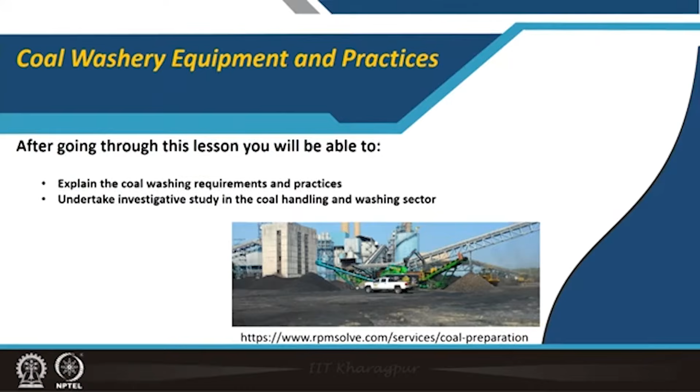many of the concentrating and screening equipment which we have discussed are also used in coal washing and coal handling plants. But still, today I am going to tell you about coal washery equipment and their practices, because this is going to be a very important business in the coming years. You know that at present 64% of our thermal power stations are using coal.

Now, though there is increasing interest and innovative technologies are coming up in the alternative renewable energy sector, non-renewable energy sources like coal are not going to be exhausted soon in India, and for economic power generation and power provision to the common people, we will have coal as a cheaper source, and for this reason you cannot ignore coal at this stage.

At present, we are producing more than 600 million tons of coal, out of which more than 90% goes to the power sector. So we need to improve this coal sector by cleaner technology, so that the coal remains clean, in the sense that while burning in the boiler it should not produce a large quantity of ash for rehandling, which could be an environmental problem. At the same time, when it is burned in the boiler, not many greenhouse gases should be released to the atmosphere.

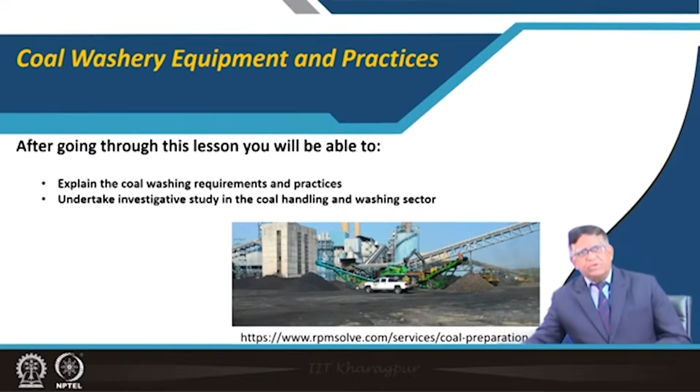So here, what is the problem associated with Indian run-of-mine coal? In India, though coal is available up to 1200 meter depth, we are producing most of the coal from less than 300 meter depth, and more than 90% of this coal is coming from surface mines. Now, we have two problems here. One is that the coal seam itself has poor quality coal.

This is because this coal was formed according to the drift theory, where organic material was brought and deposited, and under pressure and temperature it underwent coalification. In that process, a lot of inorganic substances were also impregnated in those coal seams, and that is why our coal has a high ash content.

Also, when we are doing surface mining, we do not do much selective mining, and at the coal floor or coal roof, between two layers of sandstone or shaly sandstone where the coal is, when you extract by blasting, a lot of non-coal material gets mixed up with the coal, and we call it dilution.

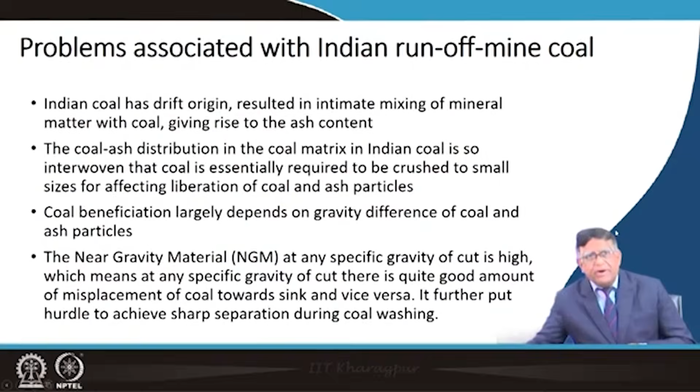Now the cleaning part of it is why coal preparation is so important, because if we liberate or separate this ash part, the non-coal part, then it will be doing ash reduction, which is a requirement from the environmental side, because disposal of this ash is a problem, and a lot of very fines get generated and create air pollution.

So the particulate matter going to the atmosphere is reduced, and also the ash handling in the power plant, that is after burning, cleaning your boiler, taking it out and separately disposing it in a place, that problem gets solved.

And moreover, sometimes in this beneficiating or washing process, if the coal inherently has sulfur, that sulfur can also be reduced. When sulfur is there in coal, it has a lot of other problems, for the boiler life as well as in washing, and if you are putting it in your metallurgical coal, it may totally affect the quality of your end product.

Also carbon emission reduction is another issue: when you are getting a high calorific value, you get it properly burned, and your carbon dioxide production is controlled. Greenhouse emissions can also be reduced, and the different gases coming out of your stack can also be controlled.

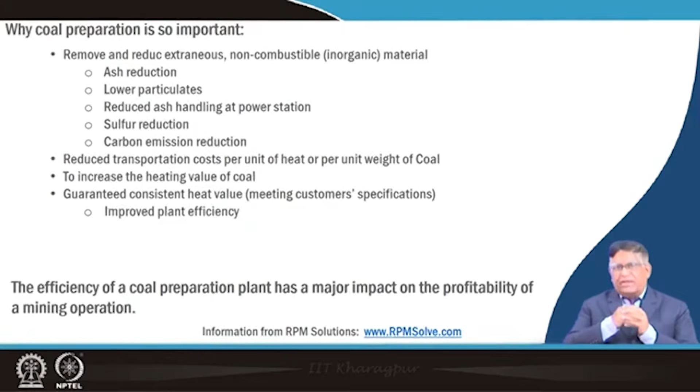Now the efficiency of the coal preparation plant has a major impact on the profitability of mining operations. That's why all coal mining people think about how the best quality can be given to thermal power stations. Now you must know the scenario of our Indian coal, how they are classified.

You know that we have metallurgical coal, called coking coal, and non-coking or thermal coal. Coking coal, depending on the percent of ash: steel grade 1 not exceeding 15% ash content. Similarly, grades 1 to 6 are there, up to 42 to 49%, which is very poor quality. In steel grade you have these two, and then the washery grade, which you can wash. This is the grading system of coal by different percentages.

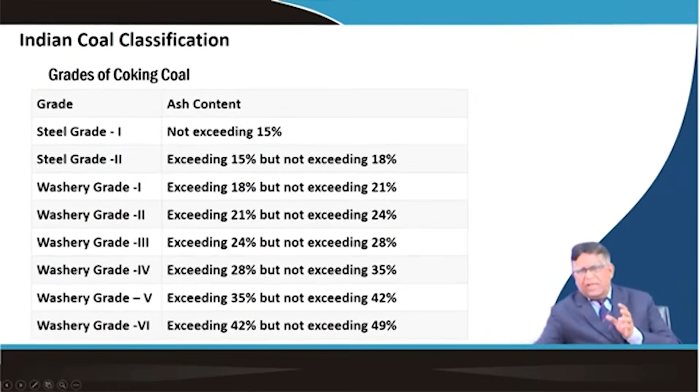But recently there have been certain changes in this. You can see the semi-coking grade has also come, based on ash and moisture together. If they do not exceed 19%, it is called semi-coking grade. And if ash and moisture together are between 19% and not exceeding 24%, they are also called semi-coking grade. Now why is this grading done?

Because on that basis our Indian coal pricing was done, but a lot of thought is now going on about exactly how coal should be priced and how the grade should be determined as a national level standard. People are still doing research on that standardization, but this is the accepted norm at present.

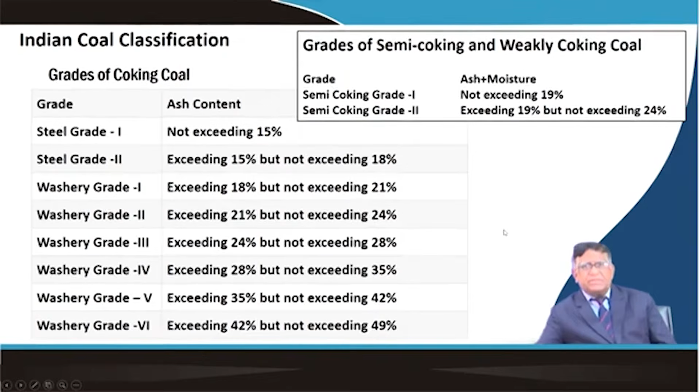And now they are given a grade. For all thermal grade or non-coking coal, the grading is given up to 17 grades, and this grade is given on the basis of the calorific value, that is, how many kilocalories per kg there are. Now if you are getting more than 7,000 kilocalorie per kg, then it is grade 1. In India there are very few mines where this grade 1 coal is available.

Some were there in the northeast coalfield, some places up to 7,000, 7,500. However, they had the problem of ash content. But G4, G5 are to a certain extent available in Raniganj coalfield, and in Bharat Coking Coal field also. But most of the coal in our country is going to be G11, G12, and the big companies producing a lot of coal, for example Mahanadi Coalfields, have more mines with G9 to G13.

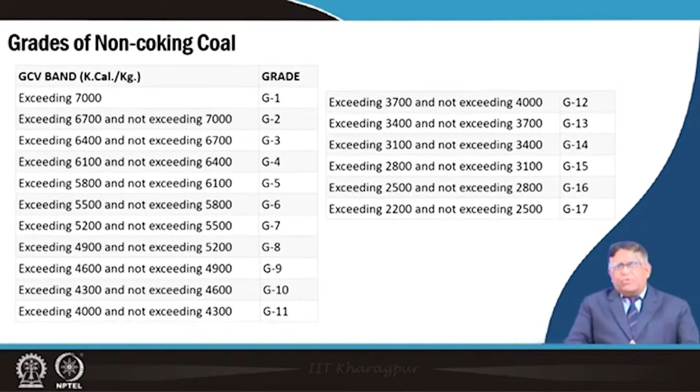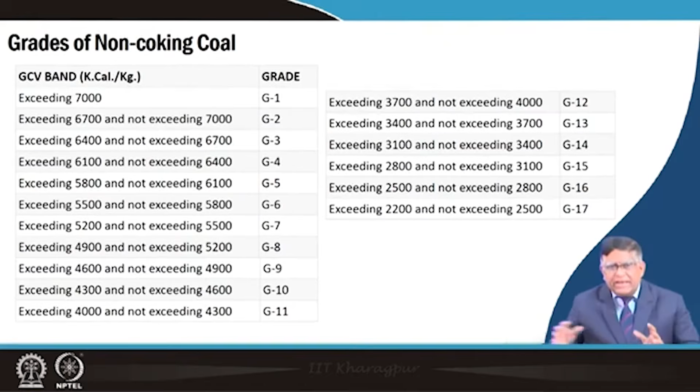That means getting 3,500 kilocalorie per kg is a very good expectation. There are many places in India where you are burning coal and get only somewhere near 2,500 kilocalorie per kg. Those are G17 type of coal, and accordingly the prices are fixed for this coal. You should have knowledge of this.

Since pricing will be on the basis of the grade, the impact is that the mine can think of how to optimize their mining operations and how they will handle the coal produced. If they have a different quality, different calorific value, and can improve it, say from G5 quality, by cleaning bring it to G2, or if they have G10 or G12 and by combining them can make it G5, then their economics will work.

So on a case-to-case basis, an economic study is carried out. That means if they want to invest in a washery, exactly how much return they may get, because of how much blending will be possible. So there can be a lot of decision-making problems. Whether you will invest your money in a washery or not can be decided on the basis of this. Mathematical models can be created on the economics of coal washing.

The Government of India has taken a number of initiatives. Actually, the need came from impositions from the environment sector. If you are selling coal with a very high ash content, it should not be carried a longer distance. That's why for power plants located more than 1,000 kilometers away, there was a restriction of not more than 34% ash, because otherwise you are wasting transportation per ton of coal. You will spend more fuel, and moreover you are carrying the pollutant from one place to another. So certain restrictions are there.

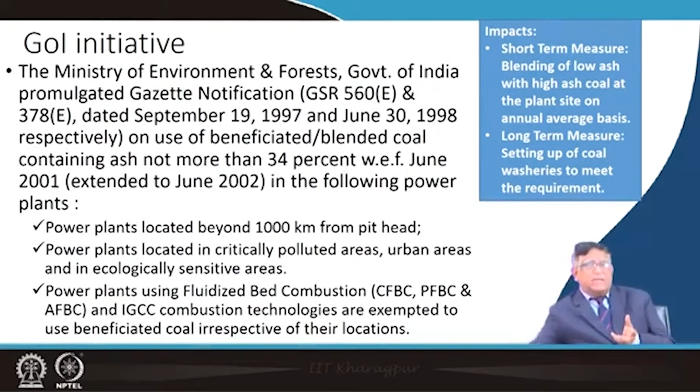So how exactly is this washing done? It is done by two methods: dry deshaling or the wet process. In dry deshaling, other than water, you can use air, and with that you will be able to separate it. That is a dry washing system.

In the wet process, as we already discussed in mineral beneficiation, instead of the mineral, the coal is crushed into smaller size and put in a liquid media of adjustable specific gravity to separate the lighter coal. In that media you increase the gravity by adding certain particles, so the media becomes heavier and the coal can float. The rejects from this process will have a lot of carbonaceous matter. So in a wet process, when producing washed coal, the rejects, which we call tailings, will go to the tailing dam or tailing pond.

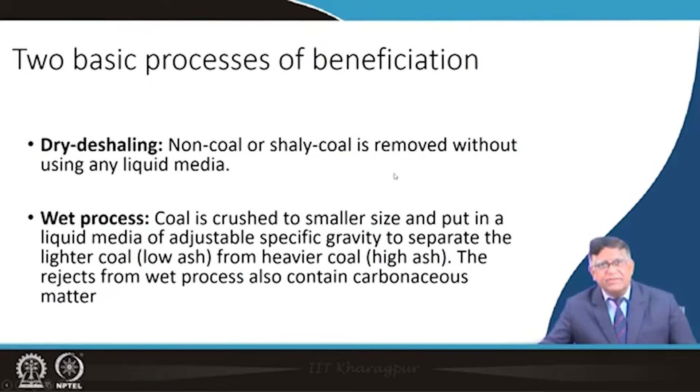There will be a lot of carbonaceous particles, and we discussed earlier how very fine particles of coal lying over there can be recovered to use their calorific value. That is also an area where future research and technology need to be developed.

In our Indian coal cleaning practice, earlier only coking coal was being washed, because steel making needs coking coal with ash up to 17 to 18% in India. Now the raw coal, whenever it comes from the mines, is washed, and the ash content in most of our coking coal coming from BCCL is at 25 to 30% ash.

So they had to be washed, and that is why the coal washery was established in India after coal mine nationalization. Some of the very old coal washing plants, like those in Sudamdih and other mines, were running. Now, since the Ministry of Environment and Forest introduced restriction on the use of high ash coal in power sectors, washing of non-coking coal has also become essential.

It is a comparatively recent phenomenon. According to government rules, any thermal power station situated beyond 1000 km from the pithead coal mine must use coal having less than 34% ash. So that created a new business - the mines will have to build up their washery.

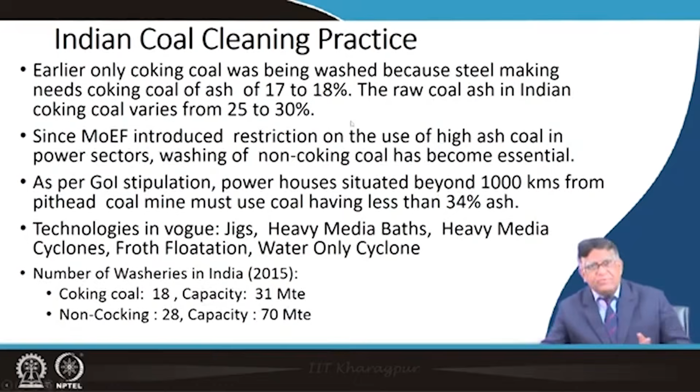You can see that in the coking coal sector, Coal India alone has 11 washeries, and other public sector units have 3 washeries. In private sector, some coal companies import from outside, but as per the requirement of the steel plant, they need to wash them. That's why they also built washeries.

In the coking coal sector, these 18 washeries came up, and in the non-coking coal sector, Coal India had 7, and the private sector came up with 21 washeries created across different subsidiaries. In total, our Indian coal washing capability is about 101.30 million tons right now.

Our coal consumption in the country is more than 750 million tons by now, and in another 3-4 years we are thinking 1 billion tons of coal will be consumed in India. If a certain amount of this coal is to be washed, that means there is a big business line.

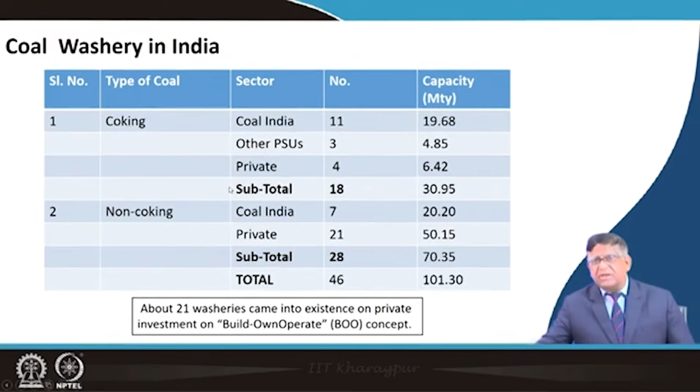So public and private investment came up, and a number of Indian firms started constructing these washeries. Now, coal preparation is the removal of undesirable material - whichever non-coal part is in the coal - which has to be separated from the ROM, run of mine.

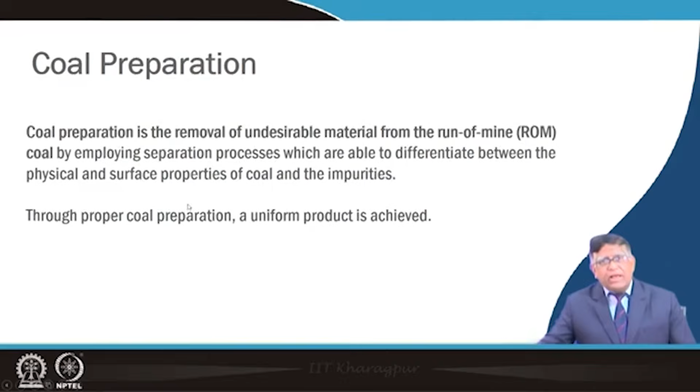Then, the separation processes which you have already studied will have to be done, and this gives a uniform product. Now what are the steps?

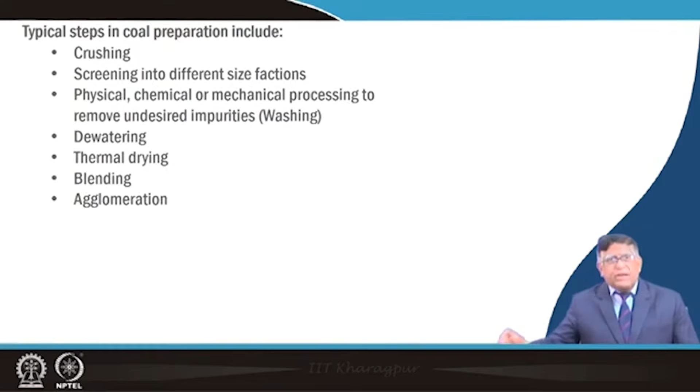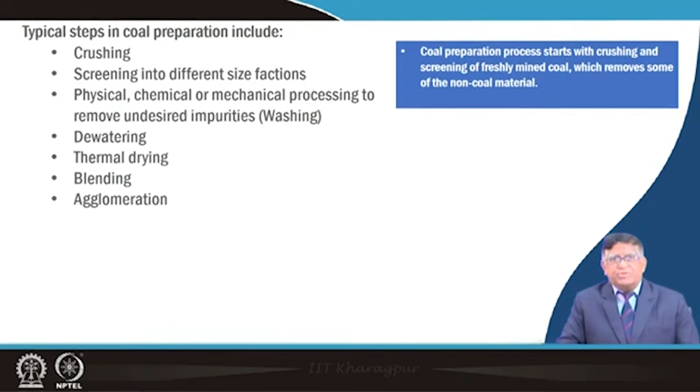You can note down the steps in coal preparation, which include crushing. Crushing is the first job you will have to do. This coal preparation process starts with crushing or comminution, where your freshly mined coal will be crushed into pieces by different types of crushers.

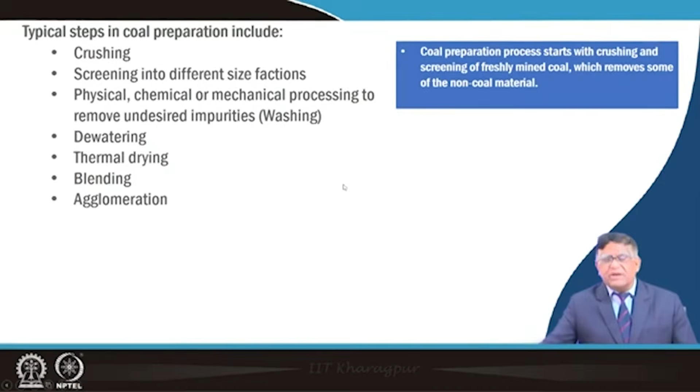There is no need of having a big jaw crusher or gyratory crusher. Softer coal may be crushed by a rotary coal breaker, and different types of coal breakers are available. Now washing is actually the process of separation of non-coal material, and for cleaning that coal, this represents the most important step of coal preparation.

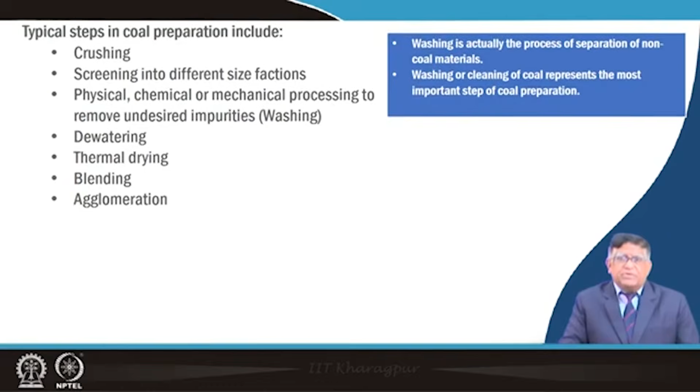That washing part is the core part of it, and for that we will have to decrease it. Then it is screening, where different size fractions will have to be screened, and then physical, chemical and mechanical processing is done. Physically means separation by density, chemically sometimes by content and constituent species.

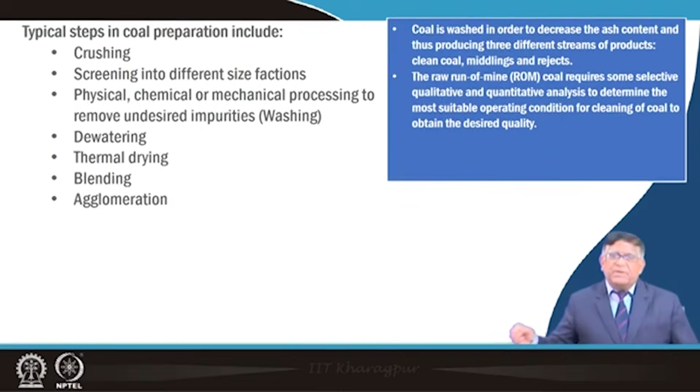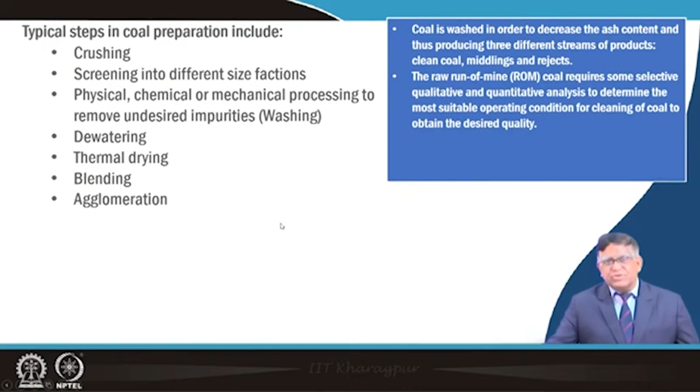Mechanically, you separate by comminution, stirring, spiraling operations. Once done by wet process, you dewater it, and then sometimes you need to dry it by thermal drying. Different grades of quality can be blended, and sometimes agglomerated. From the very fine coal recovered from tailings, if you can agglomerate it to make small briquettes, that is also done in a typical coal handling plant.

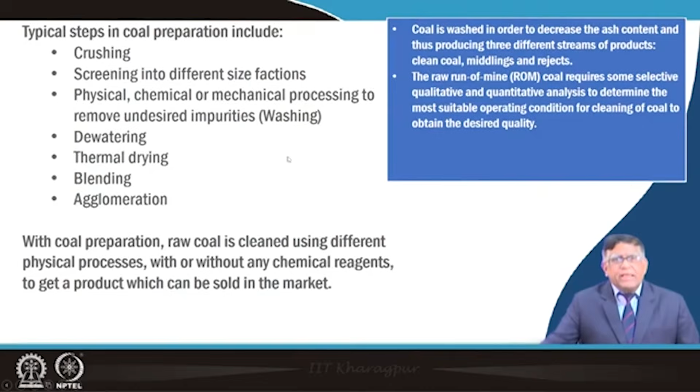With coal preparation, raw coal is cleaned using different physical processes, with or without any chemical reagents, to get a product which can be sold in the market. So that is how it is done.

The operations for cleaning the coal, summarily, are comminution, then sizing, then concentration. Clean coal means different grades - clean coal with only 7 to 9% ash, middling with 25 to 30% of ash, and reject with 65 to 70% ash, which is rejected.

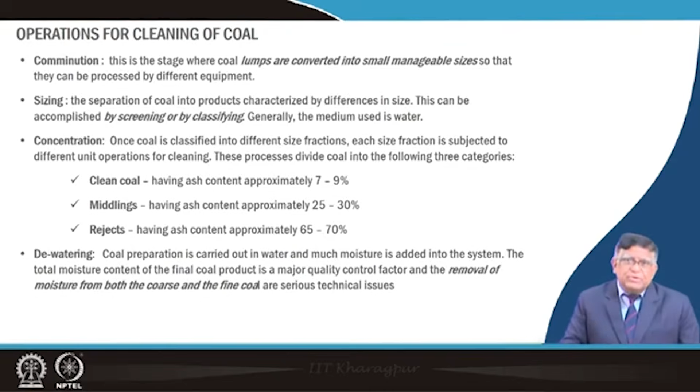Dewatering is another job, where coal preparation is carried out in water and much moisture is added into the system. So dewatering and drying is also part of this washing process, and there are a number of different equipment available. Different types of concentrators and all we have already discussed.

Now a barrel washer is a type of washer which is used - even used when collecting river stones for civil engineering purposes, in river sand and stone mining, where material comes with a lot of soil, dirt or sandy particles. They are fed into this type of barrel washer through a hopper, and the feed material goes through a chute inside it.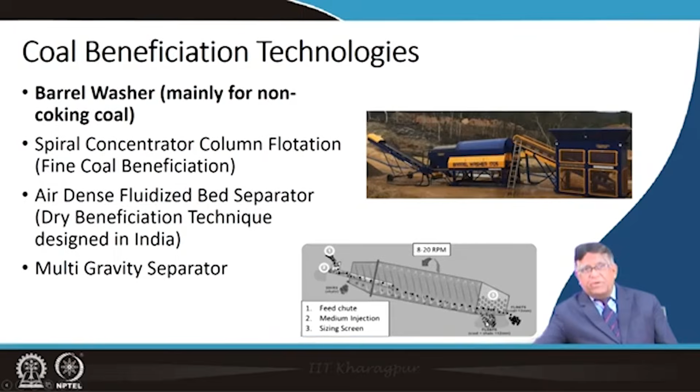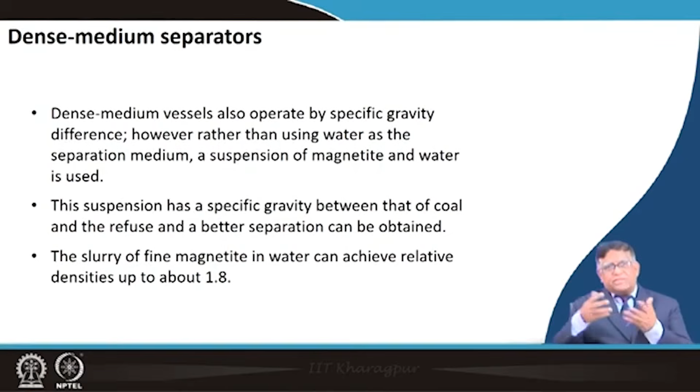There is dense media separation, which we have discussed earlier, where a high specific gravity material is mixed in. Often they use magnetite and water, and as this moves, the coal particle becomes lighter than the media, so it comes up and is separated from the top. That is how dense media separation is used.

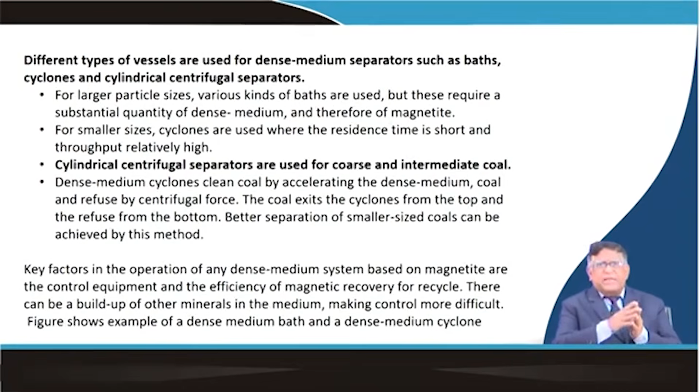For this dense media separation, different types of baths, cyclones, and centrifugal operations are used. We have earlier discussed how these different cyclones, water-only cyclones, or media baths can be used for this. But another thing, when we talk about dry washing, is the air dense fluidized bed separator.

In this, no water is used, but air is pumped in. There is a conveyor belt with a scraping system - a chain conveyor running as a scraper - and there are holes here. When the mixed material is fed, compressed air is passed into it, which gives a jerking motion to the material.

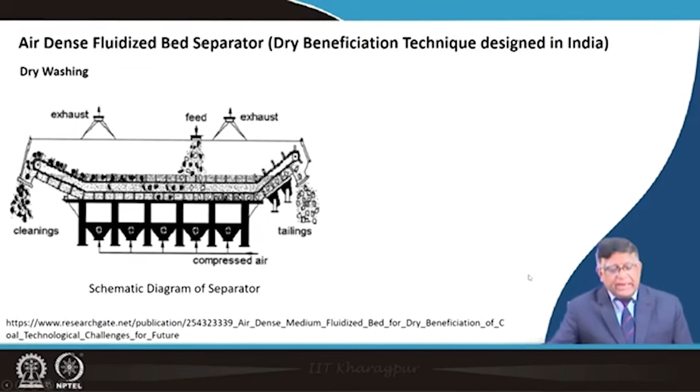By that jerking, the smaller and lighter particles come up here, while heavier particles go into this section, which is scraped by the scraper chain conveyor and rejected to the tailings. The lighter, useful part, which floats over these air vents, is separated as the clean product. So this type of air dense fluidized bed, or dry deshaling, is also carried out.

In dry beneficiation, a number of parameters affect performance: the feed characteristics, feed quality, coal quality, bed stability, the medium characteristics such as air flow, and the fluidized bed geometry, that is how they are arranged for floating. Operating conditions matter too, such as whether coal and magnetite are used and their ratio, the superficial air velocity, air pressure, and processing time required. These factors affect how separation of non-coal material takes place.

The bed vessel has geometric dimensions, and these determine how the air will circulate over it. Again, the size distribution of particles, how the crust forms, and the total bed porosity, along with how compact the material becomes, are all different factors that affect it.

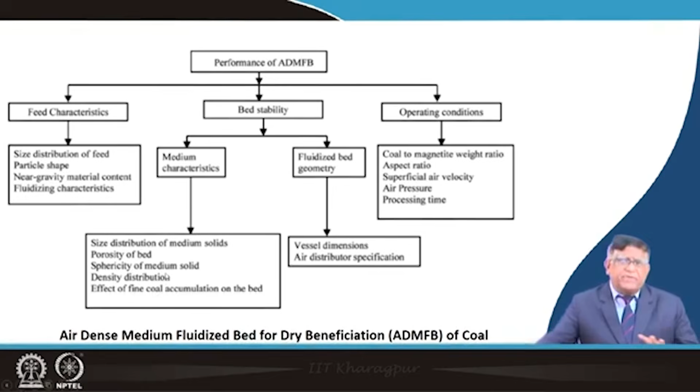When you want to do deep studies in this area, you will have to delve into it. You may try to find out, while doing the job of crushing, the difference between an iron ore crusher, a rice powder making crusher, or a coal crusher, and make a comparative study.

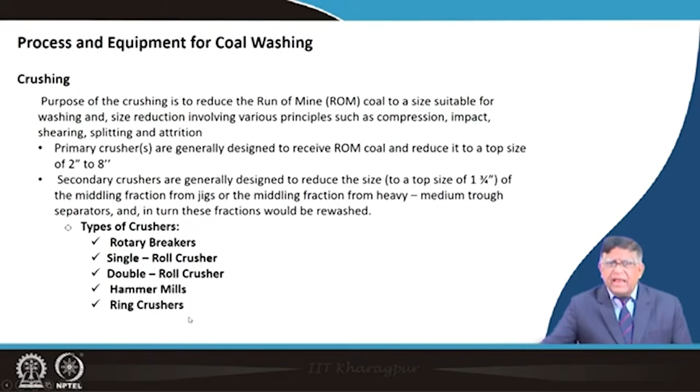The types of crushers used for coal are rotary breakers, roll crushers, double roll crushers, hammer mills, and ring crushers. These are the different types of crushers they use.

For screening, as seen in other screens, you have the scalping screen or different types of coal screening systems, depending on what type of size material is being demanded. But the most important thing comes with desliming.

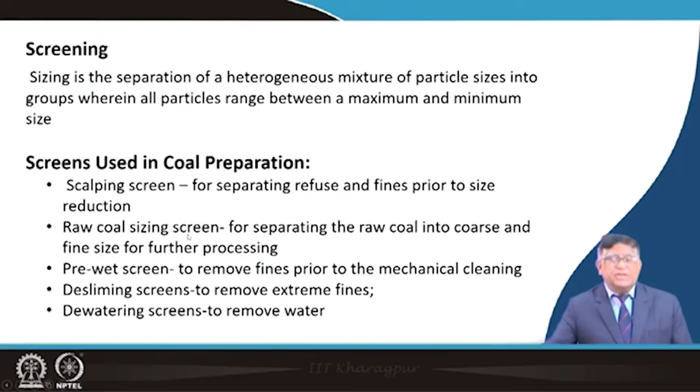We have discussed desliming operations, where very fine screenings are necessary. Once you know about these, these are the things present in the washery.

I hope you will be able to study performance indicators for a coal washing plant, such as energy consumption, total maintenance required, manpower required, operating cost, capital cost required, and recurring costs, along with overheads, so that a cost-benefit analysis can be made for a performance indicator.

Explain how you can improve the productivity of a coal washing plant. A coal washing plant has an objective regarding productivity: what amount they want to produce, of what quality, without giving any environmental load or environmental footprint.

To explain these things, you will have to study the flow chart of a particular coal washery, prepare a questionnaire for each item, collect the data, and this will give you an idea of how to improve its productivity.

Another mini project idea is to develop a methodology for selecting a coal washery. Since there are different types of coal and different purposes for utilization, for a particular purpose, given a particular value of coal, you need to determine the best washing technology to use.

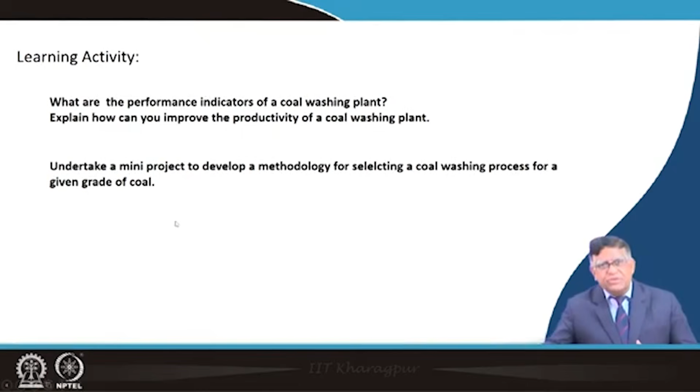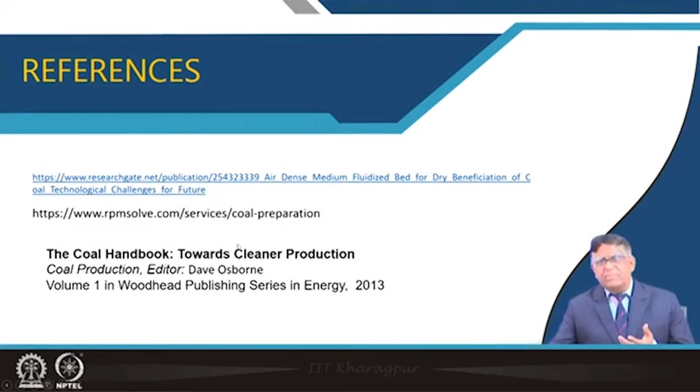You are advised to study books like this coal handbook, which may be in your library, along with other mineral processing and coal washing books. On the internet you may find many good and relevant articles. To start with, you can do a Wikipedia search, and from there gain the basic general knowledge needed for carrying out serious studies.

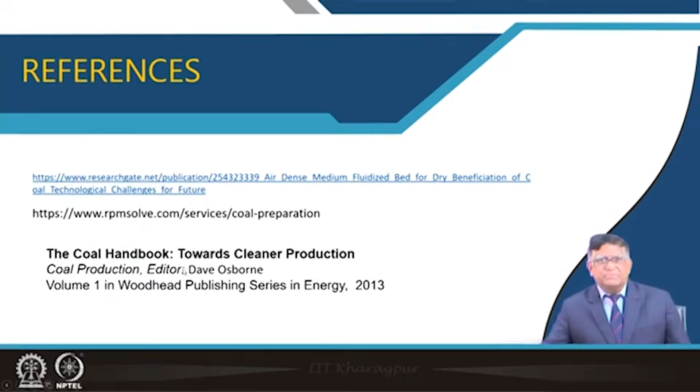Thank you very much. Coal washing will remain an important bulk material handling operation in India, as coal grades in future may further deteriorate, and coal is going to stay for another few decades, even though solar and wind energy are increasingly exploited. More R&D and innovative technology deployment will happen in this sector in future.